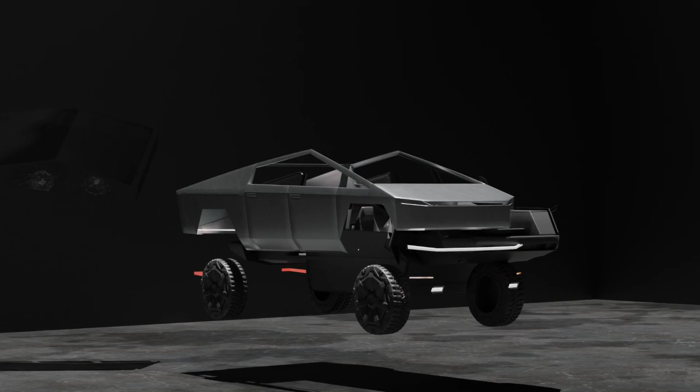This is a vehicle that is built like no other. This vehicle is forged from a metal only known by the designer. You see, this vehicle was designed to be used in multiple planets, and I would like to share with you what's behind the design of the bulletproof Cybertruck.

In November 2019, the Cybertruck was released as a concept.

Welcome to the Cybertruck unveil.

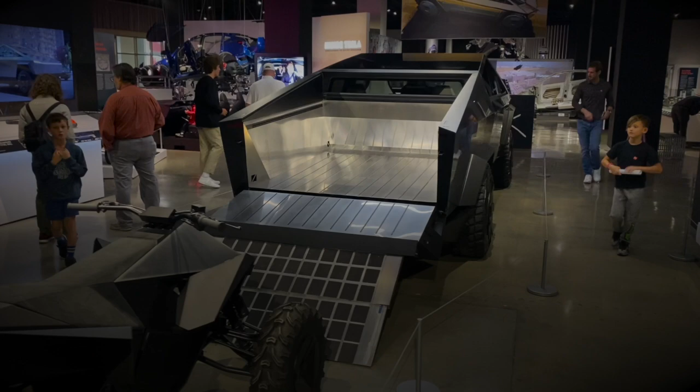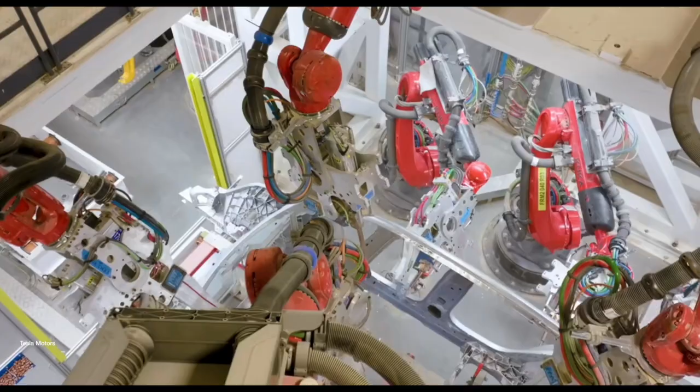It has a body design reminiscent of low polygon modeling, consisting of flat stainless steel sheet panels. 4 long years later, in November 2023, it was released to customers. The Cybertruck is crafted in the Texas Gigafactory located in Austin, Texas.

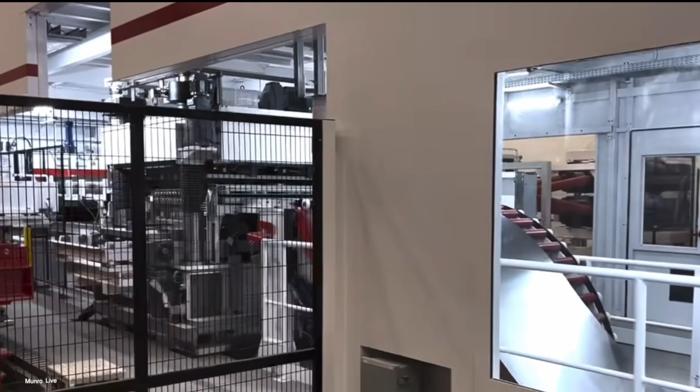The steel that is used for the Cybertruck is a 300 grade steel, rolled up in coils for the next step of being made into micro precision level blanks. The machine that is used is the first of its kind, known as the laser blanking line. It takes coils and unwinds them and begins taking out the internal stresses from the raw material as it passes through the leveler.

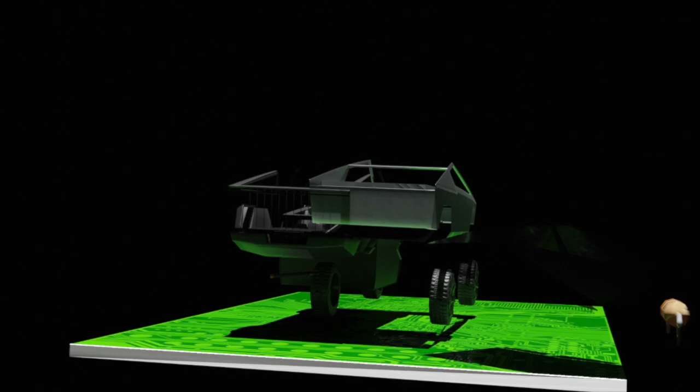The Cybertruck doors are 1.8 millimeters thick, and the sails and the hood are 1.4 millimeters thick, which has been adjusted over time to be thinner than the 2.53 millimeters, which was the original thickness, but it still maintains the bulletproof durability. The HFS, or hard freaking stainless, were strengthened during the process.

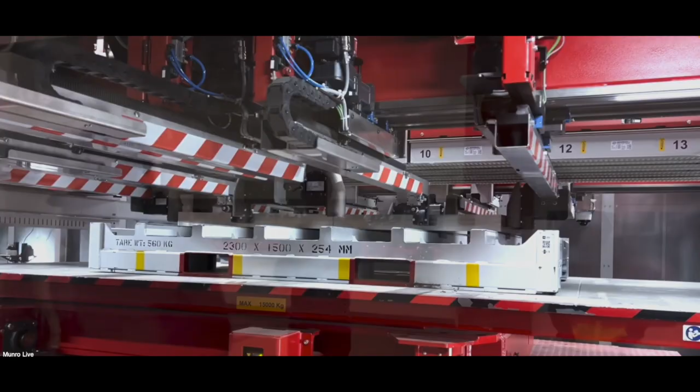The parts are separated from the parts for consumers and the scraps, and then stacked. This is a careful process because the only thing that can scratch HFS is HFS. They stack them one on top of the other, which has to be done carefully since the steel is not covered with plastic. It's too bulletproof for that. These are separated by tailgate, hood, and door. We are on the first floor where the inner portion is manufactured.

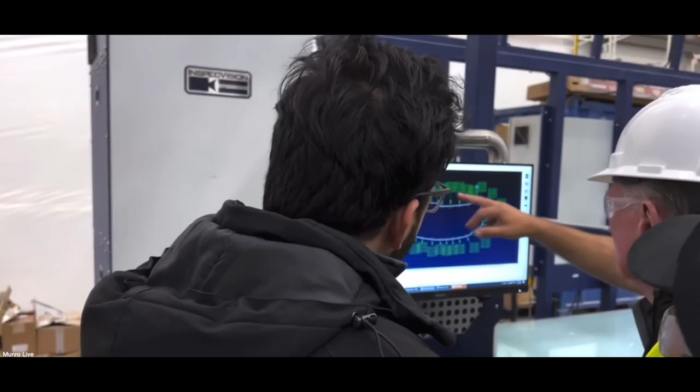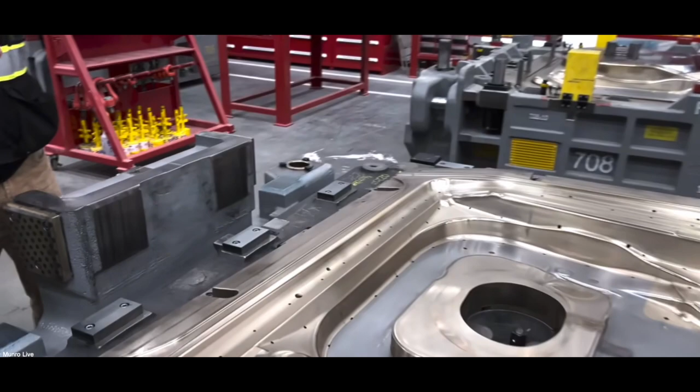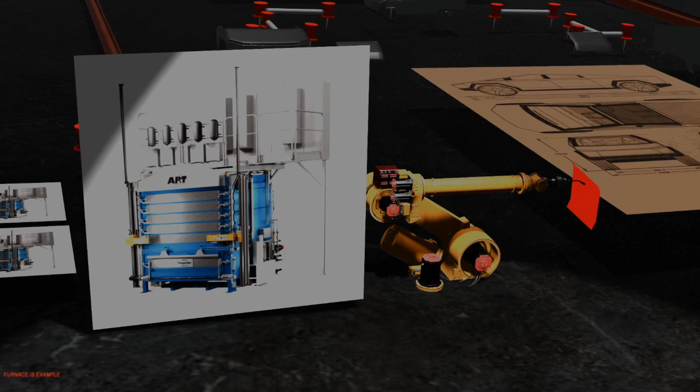Next, the furnace, 3 of them. There are 7 chambers in each for a total of 21 shelves. They heat the material to 900 degrees Celsius, then place it in the press. The upper and lower dies are held in place anywhere from 6 to 8 seconds with water running through each one. This furnace prepares the inner and outer panels.

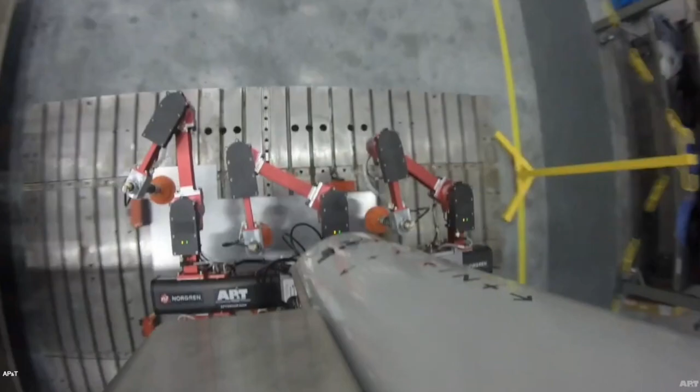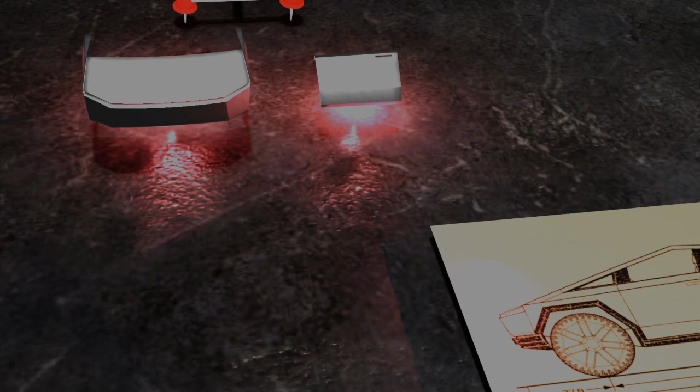Once they have been stamped, they are then stacked on a pallet for the second floor. The Cybertruck has over 100 panels that are moved to the second floor to form the body. For the doors, an air bender is used to pick up the parts and bend it to form the needed shape for the panels, such as the doors and the hood. The machine will blow air from the bottom and bend as well as measure the part.

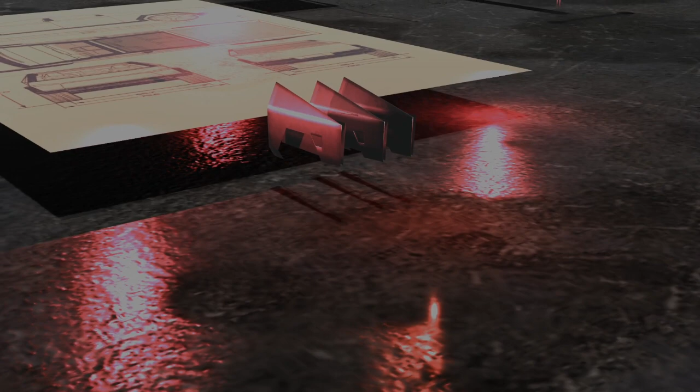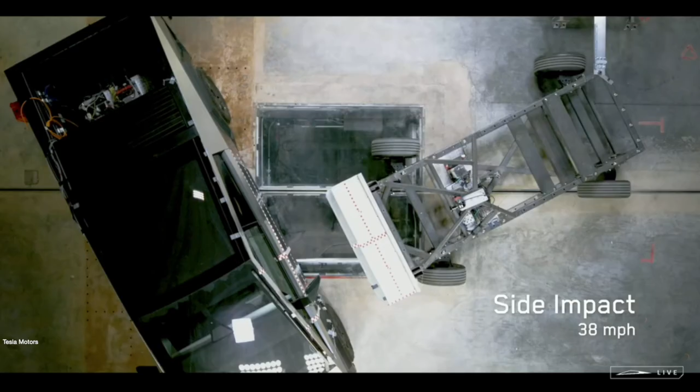The door panels are 1.8 millimeters thick. Everything else is 1.4 millimeters, which makes the Cybertruck bulletproof. As well, the thickness helps against crashes. It actually takes about 75% of the side crash load just through the side panel itself.

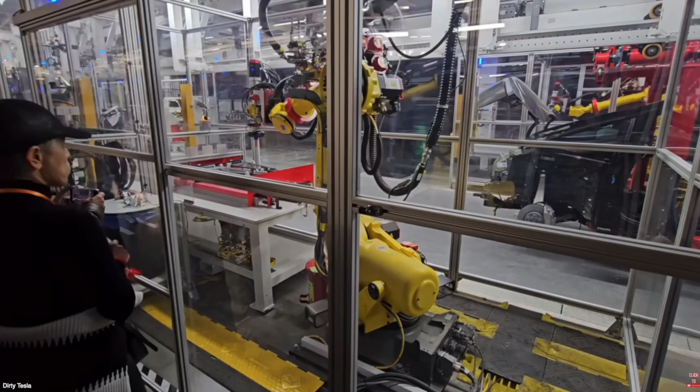While the inner panels are forged on the first floor, some of the outer panels are prepared on the second floor. Then there is the simple part, the laser booth. The laser booth is used to combine the outer panels. The parts are transferred to the second floor by means of an elevator. The casting is done on the first floor.

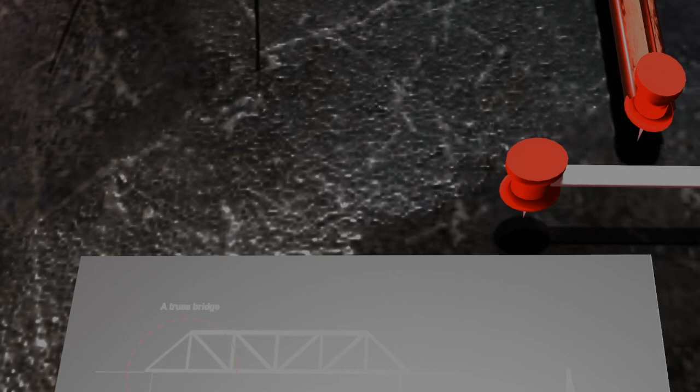The first casting is made with the same machine that is used for the Model Y, made with 6,000 ton casting machines, while the rear is done by a 9,000 ton casting machine. All these pieces fit together to make a structure of a Cybertruck that is built similar to that of a bridge. The design is simple. There is not much to the structure, just forward thinking, relying on engineering that has stood the test of time.

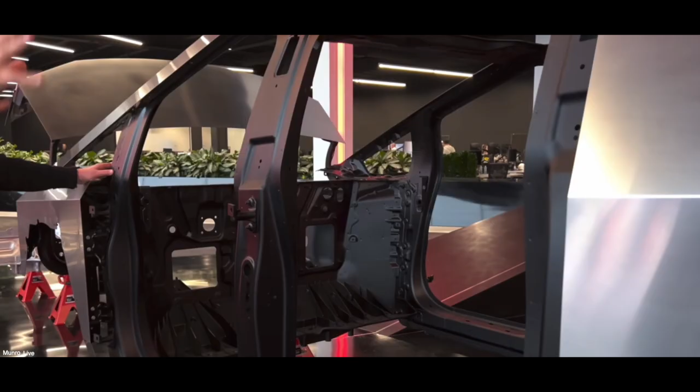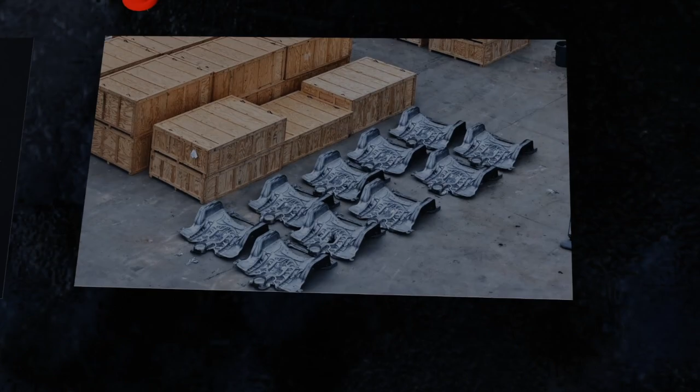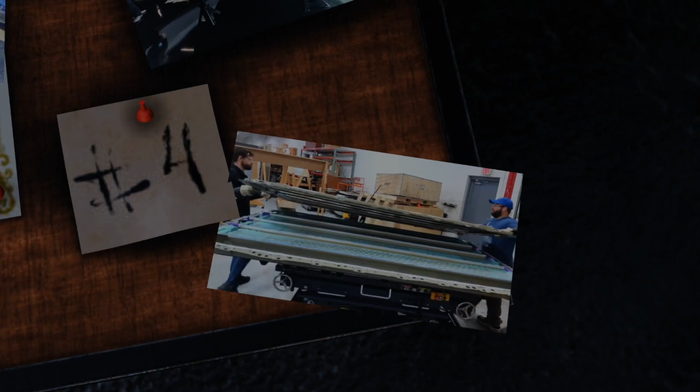The battery is a 4680 cell, made in-house by Tesla. Similar cells are actually used in the Model Y. The seats are stacked on the battery of the truck in front, and the back seats are connected to the back of the truck so they can be lifted up. It is a similar assembly to that of the Model Y for this portion of the vehicle, with the seat and console being lifted from underneath the vehicle.

Some of the new features that are not in any other Tesla model is the tonneau cover that has been designed to withstand 300 pounds of weight. It allows the items in the bed to be covered and is made with high-grade material.

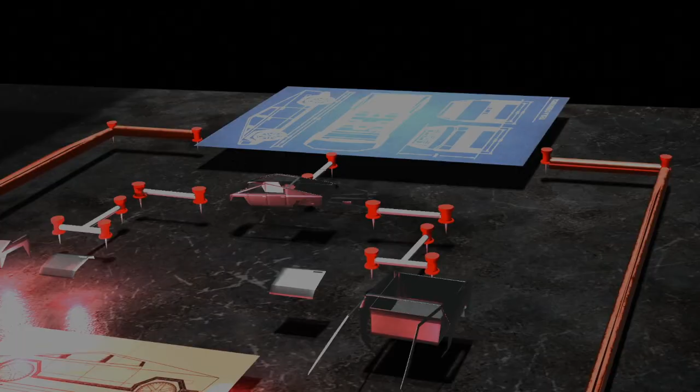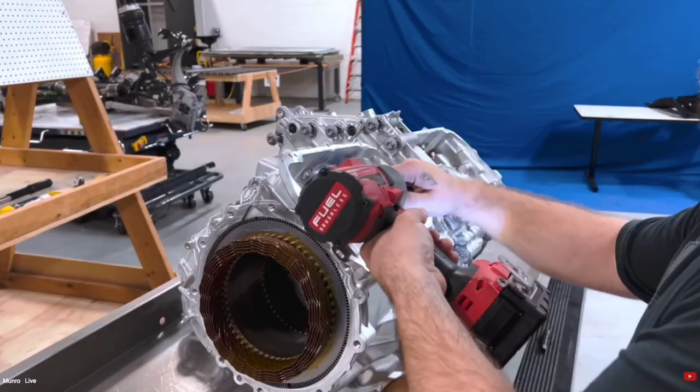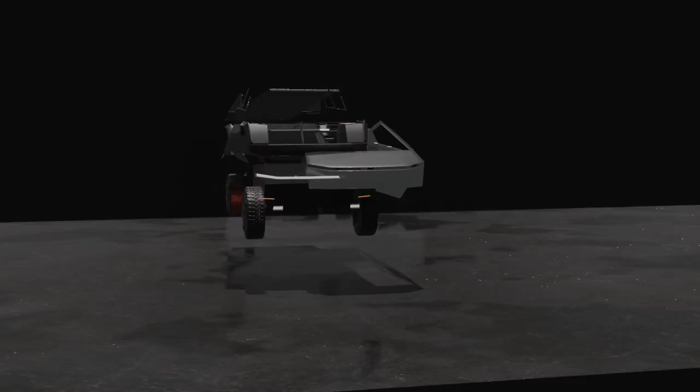After all the pieces are set in place, as well as the motors, which are of a similar design to that of the Tesla Semi, and essentially the same as the Model Y motors, the vehicle is capable of receiving 600 horsepower for the dual motor model, and for the tri motor reaching a combined 834 horsepower, making the Cybertruck one of the fastest trucks on the market. If you were to design a truck, you may have not designed it quite like this one, but one thing is for sure, you will never forget the design of the Cybertruck.